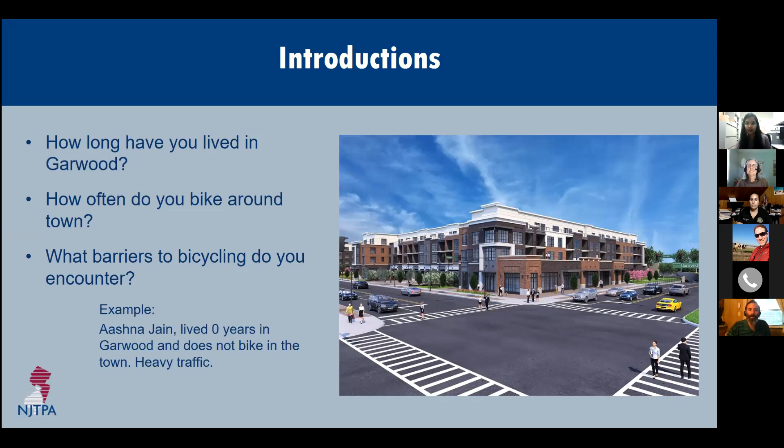Let's get started. First we'll discuss some of the basics of complete streets. Many of you might already be familiar with the term, but we'll still cover some of the basics again, as it's important for the discussion that everybody is on the same page.

Complete streets are designed and operated to enable safe access for all users: pedestrians, bicyclists, car drivers, freight and transit users of all ages and abilities must be able to safely move along and across a complete street. Complete streets make it easy to cross the street, walk to shops, and bicycle to work. A complete street offers many travel choices, as it accommodates all modes, connects to a wider network of transportation system, and is fully accessible to all, irrespective of how you get around.

It varies according to context, depending on the needs of your community, and as an end goal, it improves safety for all. Its benefits are many and varied.

It promotes healthy lifestyles by encouraging active modes of transportation like walking and biking, provides important connections to local destinations, creates more livable communities, reduces traffic congestion by giving alternatives to driving, and reduces reliance on fuel since it encourages greener modes of transportation. It also makes fiscal sense because incorporating sidewalks and bike lanes into the initial design of a project spares the expense of retrofitting later on, and it encourages economic investment in the community.

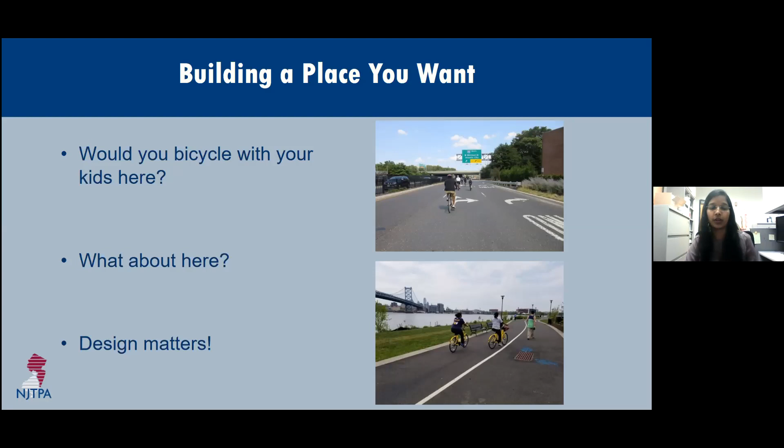When it comes to bicycling, people are commonly divided into one of these groups: the strong and the fearless, which is like 1% of the population, can bike anywhere and everywhere. They love to bike and nothing can stand in their way, not infrastructural conditions.

A larger group, 5 to 10%, are more enthused and confident people. They're a little more picky about where they will bike, and they prefer low stress roadways and paths.

The next is most of the population that is interested but concerned, and it makes up about 60% of the population. They have biked before, but don't do it often because they don't feel safe. And when they do bike, they do so in parks or as a part of events.

These people can become enthused and confident with improved facilities, encouragement, infrastructure, and overall experience. Lastly, of course, there are some folks who simply have no interest in bicycling, about 30%, or cannot due to a physical condition. However, these folks likely have friends or family members that are interested in bicycling.

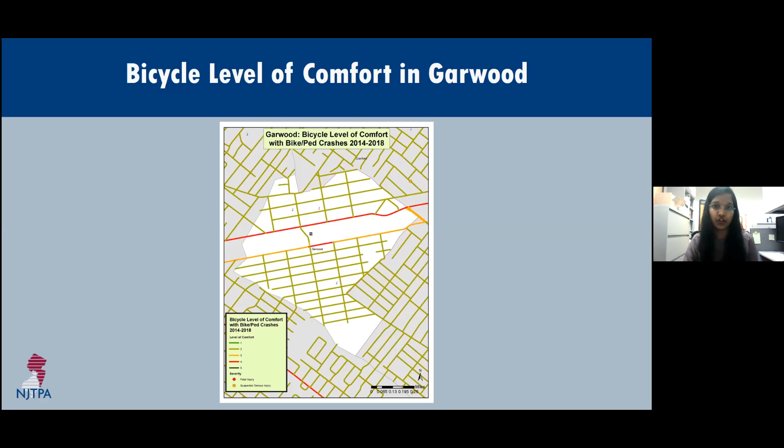We are here to help Garwood create a bicycle network plan, which leads to the question: what is a bicycle network plan? A bicycle network plan envisions how to complete the streets by providing accommodations for bicyclists. It identifies and builds a practical option for those who may want to bicycle but are not comfortable doing so on an incomplete street.

These facilities should provide connections to common destinations like workplaces, schools, transit, shops, and recreation. And we'll see and find these places in Garwood around the study area. Almost all of these destinations are also near the home, which is where most people spend the majority of their time.

According to the National Household Travel Survey, 50% of all trips in the US are short distance trips, like under 3 miles, and they could be done quickly and easily on a bicycle. The reason most of us don't do this is because roads are not designed for it. And by the way, this data is from before COVID.

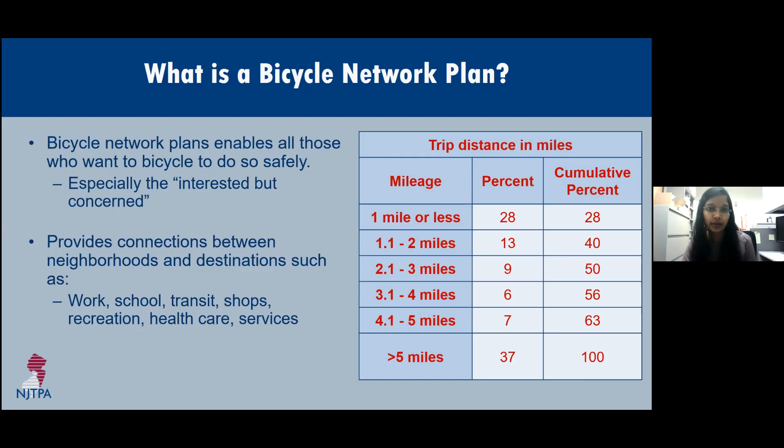A successful bicycle network plan is one that shows what kind of facilities work best for each road segment, taking into account everything that makes it unique. This includes factors like road width, speed limit, parking, and other unique circumstances. A good bicycle network plan is convenient, continuous, connected, and complete. But that's not all—it should also be comfortable, safe, intuitive, and visible for all ages and abilities.

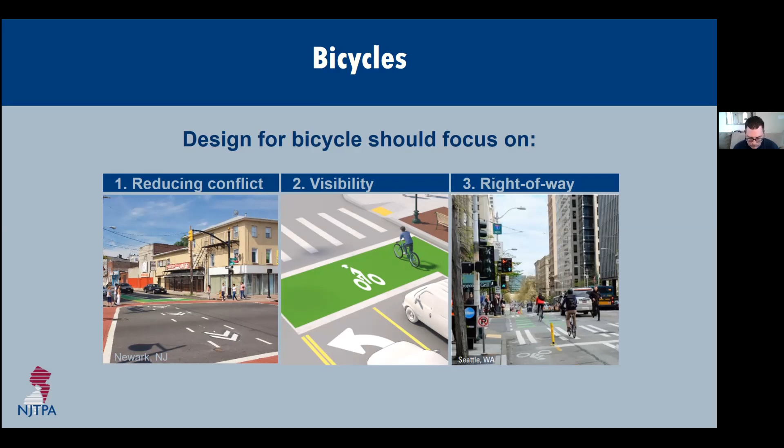Here we'll look into specific types of bicycle infrastructure facilities and options. When it comes to safety, designing for bicyclists means reducing conflict with other modes, improving their visibility, and establishing clear guidelines on right-of-way. We'll start by discussing the basic types of bicycle infrastructure that are visible, intuitive, and establish those guidelines for usage. There is a range of options available, from no separation from cars to complete separation, and more separation usually means safer and more comfortable. However, sometimes extra investment isn't needed if traffic volumes and speeds are very low.

We'll start with shared lane markings, or sharrows, which offer the least separation. Their purpose is to remind motorists that they're sharing the road with bicyclists, and that bicyclists have a lane. It also reminds bicyclists that they should ride away from the edge of the street. However, they offer no physical separation between the two modes. They're likely to help existing bicyclists, but they aren't very successful at encouraging new people to bike.

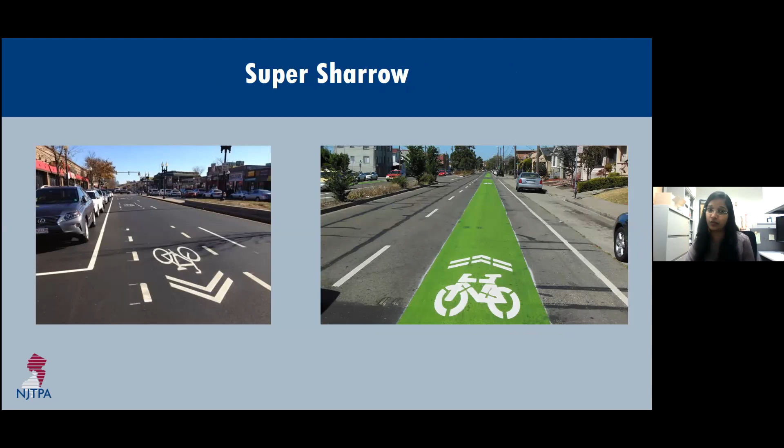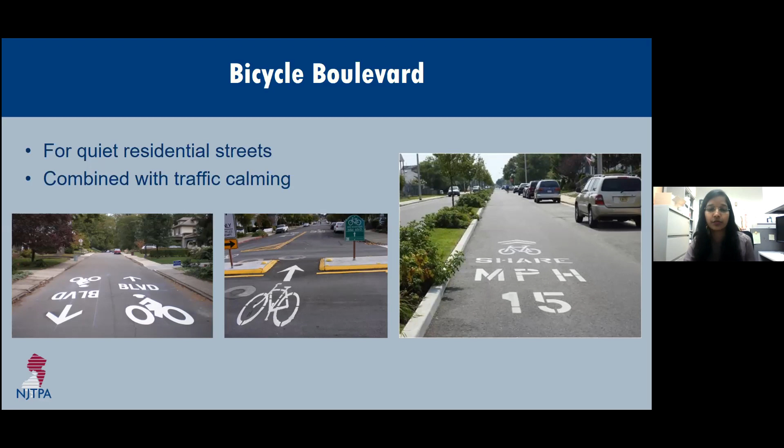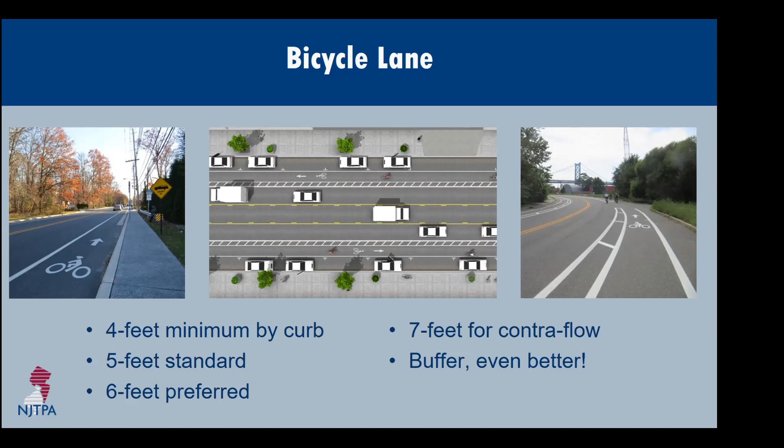How effective a bicycle lane is at getting more people to ride depends on the context of a roadway. On a high-speed commercial corridor, a bicycle lane is still only attractive to confident bicyclists. The image on the left here is from Cherry Hill, New Jersey, and this image is from Camden.

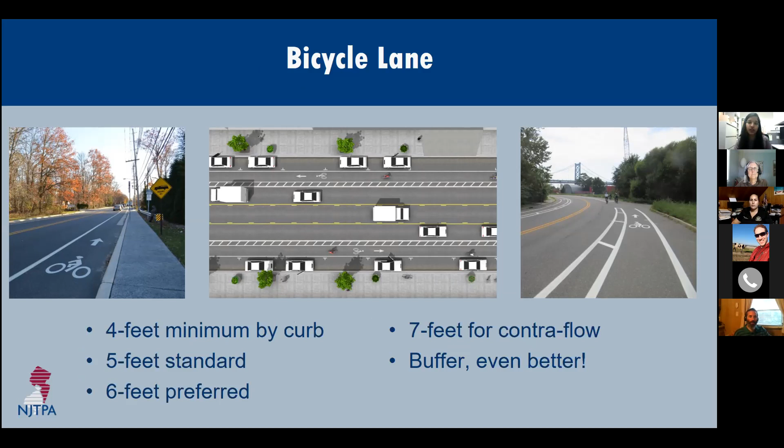This offers more safety because there is limited interaction with other traffic. For this treatment, you need at least 8 feet, and they work best if there aren't many driveways or turning conflicts. Special care needs to be taken at intersections, which can be the most stressful part of a bicycle trip.

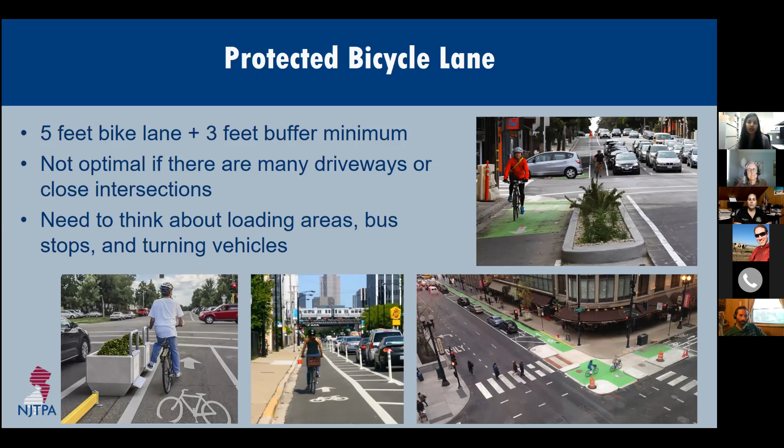A dedicated bicycle path allows two-way traffic and can be in the roadway or next to it. 10 feet width is best, but the minimum is 8 feet, and it's important to minimize turning conflicts. Bicycle paths can be shared with pedestrians, in which case it's called a multi-use trail. Almost everyone who rides a bicycle is comfortable on a path or trail, and it's easy to see how comfortable people feel when you spot children riding on bicycle paths.

I'd like to mention that a full bicycle network and plan includes some additional components that can be very localized. These include bicycle boxes that help bicyclists make a left turn, bicycle signals which remove turning conflicts, and of course bicycle parking at destinations. However, for today we want to focus on the wider network and the on-road infrastructure. While the final plan will include some site-specific recommendations, today we want to talk about the general infrastructure overall.

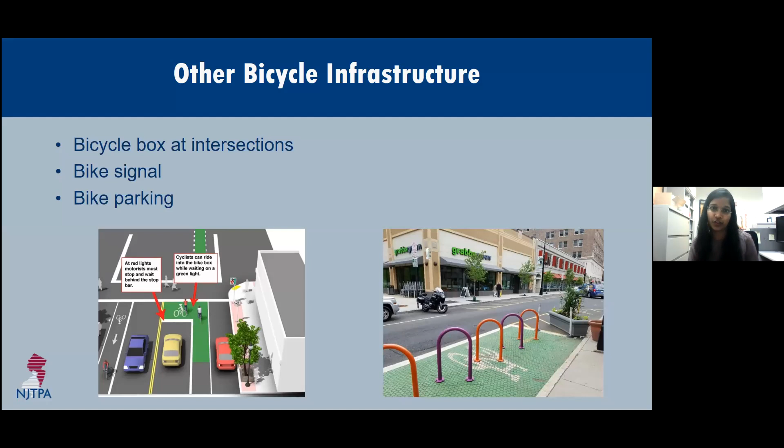So before we jump into the draft concepts, any questions about the previous slides? None have come in for the chat. Does anyone have a question? You want to raise your hand? We could call on you. All right, I don't see any hands raised.

Yeah, I see a hand actually, Bill. How can you not see a hand? Yeah, there we go. Oh, I was looking for the Zoom hand, not the real hand.

I apologize. One of my comments later on would be about the bus and the train, because they just canceled my train from Plainfield and I just biked all the way home, so I'm sitting here sweating. So I missed the first 9 minutes. You will have, I understand, complete streets - you'll have actual areas or recommendations outside of these concepts later, is that correct? Yes. Okay, thank you.

We'll go through the study corridor and specific recommendations for each street.

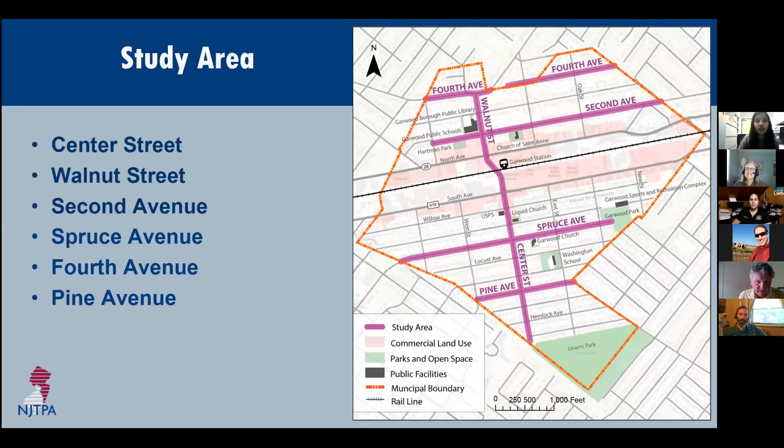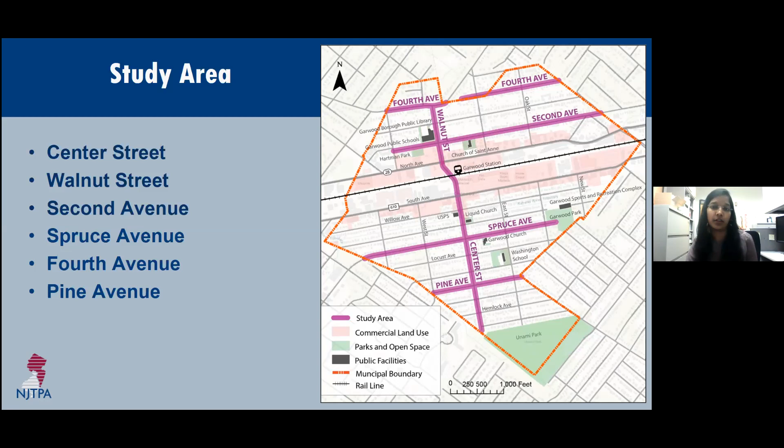Okay, so let's get started. Here you can see the study corridor. It includes 6 streets. We'll go through them in order of priority, as listed. We'll start with Center Street, moving on to Walnut, then discuss 2nd Avenue and Spruce Avenue in detail. We'll briefly look into 4th Avenue, discussing its unique recommendations not already covered in the presentation. Finally, we won't go into Pine Avenue separately, since its recommendations and treatments would be the same as other streets already covered.

Here is a map highlighting Center Street, which we'll cover in 3 parts, moving from south to north. The first part is from Unami Park to Willow Avenue, where the speed limit, as shown in the data, is 25 miles per hour. In fact, the speed limit for all roads in the study corridor is the same. We also received traffic data for these streets from the Garwood Police Department, which was really helpful in getting a true snapshot of how drivers behave on these streets. So thank you, Garwood Police Department.

According to this data, the 85th percentile speed for Center Street is 32 miles per hour in the northbound direction. This is the speed, for those who don't know, that 85% of traffic does not exceed. It's used to determine the posted speed limit on a road, which is expected to be within 5 miles per hour of this speed. Here, the 85th percentile speed being 32 is 2 miles per hour higher than expected, indicating that speeding is a concern on this side of the street.

Additionally, we see about 3,000 vehicles in either direction on average in a day, so it has a moderate average daily vehicle traffic. According to the New Jersey 2017 Complete Streets Design Guide, given this volume and 85th percentile speed, shared use lanes are not recommended on Center Street. Lastly, trucks over 4 tons - bigger than a small pickup truck - are excluded from this section, and hence 10 to 11 feet driving lanes are more than sufficient for this road.

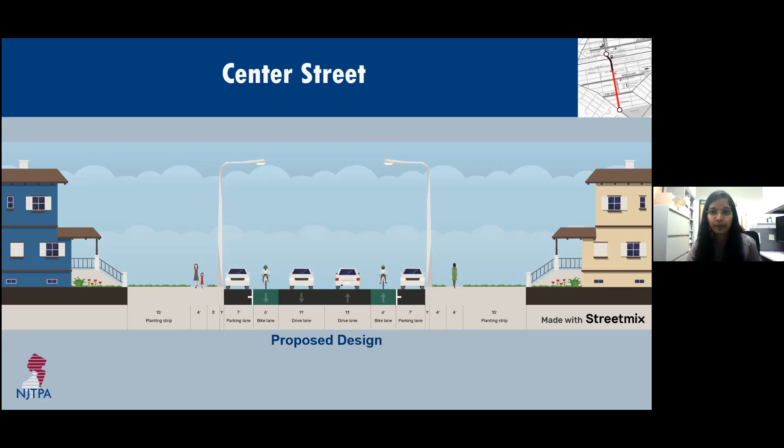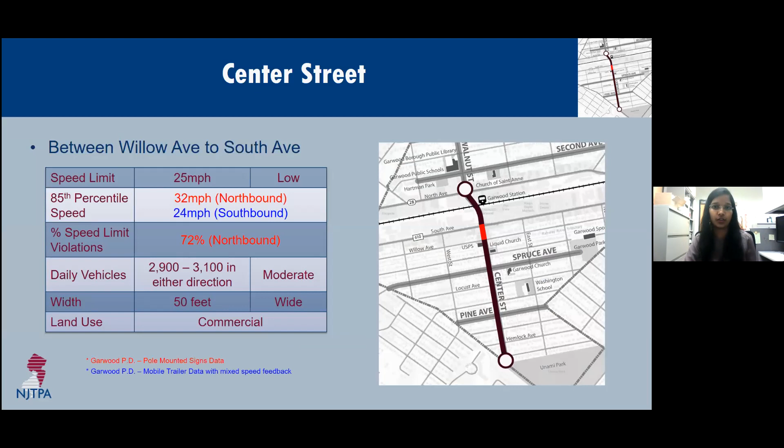The second part is from Willow Ave to South Ave, which is County Road 610. It is 50 feet wide with commercial and office uses on both sides. The traffic information for this part would be the same as described earlier, and trucks over 4 tons are also excluded from this section. This is how it looks like.

Here, the 2 lanes kind of divide with the road diet to make a 3rd lane, which is the dedicated left turn lane at the intersection with the county road. So this is the street section near the intersection. We have the left turn lane and the other 2 lanes with parking.

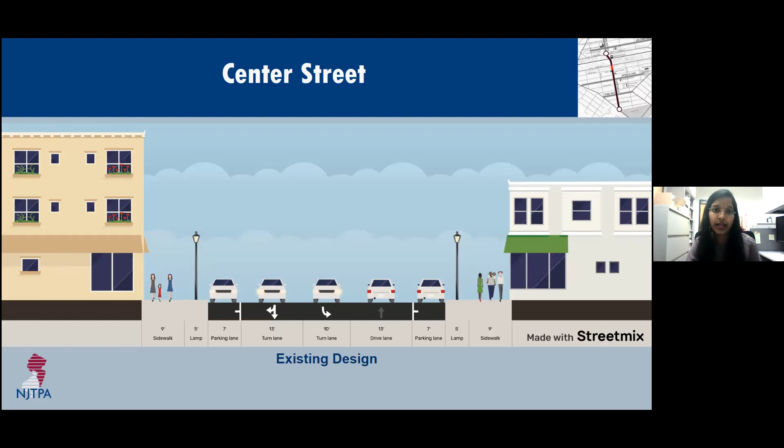With 3 lanes here, this section does not have space for bicycle lanes and parking on both sides. In order to continue the bicycle path, around 5 parking spaces must be removed from the southbound side of the street. Note that a bicycle lane is recommended for this section based on its average daily traffic volume and speed.

So if we take out those 5 parking spots, we'll have bike lanes on both sides with a barrier on the southbound side. And this is a second alternative in which we do not take out parking, and we have a bicycle lane on the northbound side only and a sharrow on the other side.

Those parking spaces are pretty valuable for our downtown businesses. Is there an overlay that I could see of how you would do the bike lane with the sharrow lane? This is the alternative for that. The bicyclist would share the driving lane with the cars on the southbound side, and the parking lane would still be there.

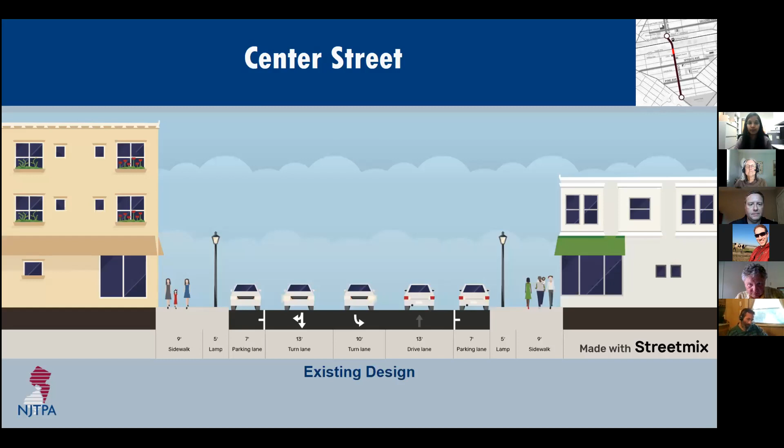I have a question. So what was the thought process for the second option of doing the sharrow going south as opposed to going north? Does that make sense? Does that question make sense?

So basically on your second version, why on one side, not the other? What was the rationale? We prioritize the bike lane on the northbound side because, as the data indicates, it has a higher 85th percentile speed.

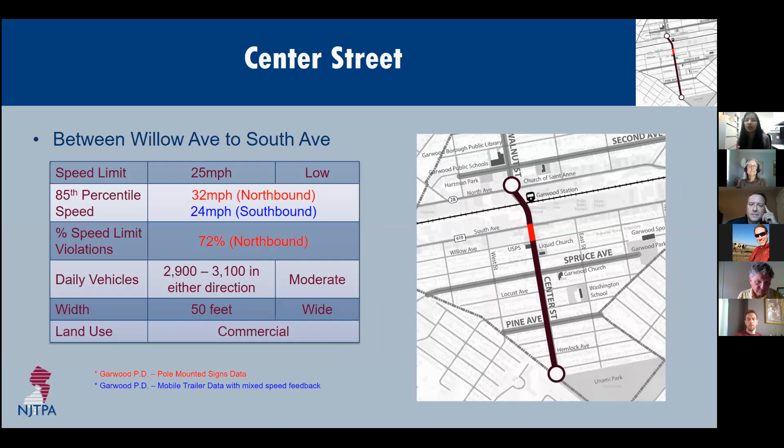And if we look at the average daily traffic for the northbound and southbound side differently, the northbound side had more traffic as well. So it had more traffic and higher speeds, which is why we placed the bike lane on the northbound side. Got it. Thank you.

Comparing the alternatives, I think for these 5 parking spaces, if the municipality could maybe adjust them near those businesses, then this could be a good option for bicyclists. But yes, we can include both of these recommendations in the final report.

Ashna, we have Bill raising his hand, his actual hand again. Yeah, I don't have it. I don't have a what do you call it, raise hand button on the bottom.

Okay, yes Chief, and if it's a choice between 1 or 2, I would definitely go with number 2. We need to keep those parking spaces for the businesses, and a sharrow for 1 block certainly makes more sense than not having a way northbound at all. We certainly don't want to come up center, end at Willow, and have people on the sidewalk.

So if you're asking for choice, alternative 2. Yeah, okay, thank you. Lisa Lee in the chat just wants clarification on which businesses are those parking spots in front of. That's a good question, I am not sure.

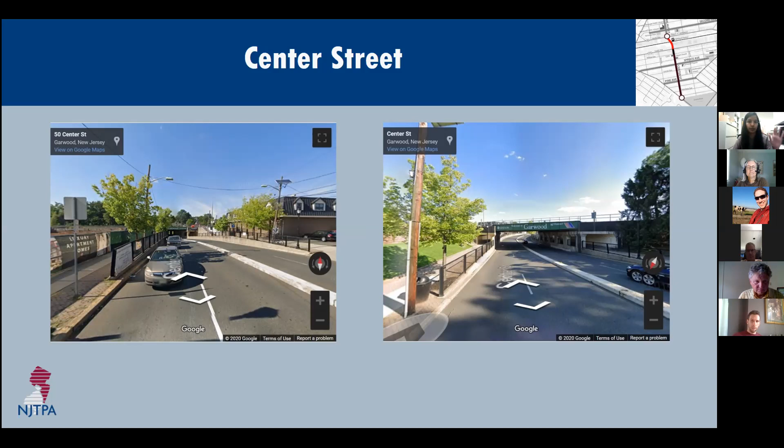This is how it looks like. It has a raised median in the center, 4 driving lanes, and a separated sidewalk. We can see the railway bridge going above it. This is a closer image of how the railway bridge and the road look.

In the section, we can see the separated sidewalk has a clear width of 10 to 12 feet, excluding columns, light poles, or other obstructions. The proposal is to convert these wide sidewalks to shared use paths that bicyclists and pedestrians can share, offering a physically separated and safer path for bicyclists. To avoid increased conflict at the terminal intersection, we propose the bicycle movement in these paths be one way on either side, in the direction of traffic.

Next, we have recommendations for the Center Street at South Ave intersection, which is challenging because of heavy traffic on both streets. Note that South Ave has a speed limit of 35 miles per hour and is 40 feet wide. This is how it looks - it has pedestrian striped crossings and pedestrian signals.

This map shows the crash data for Garwood bicycle and pedestrian crashes from 2015 to 2019, and we can see that bicycle and pedestrian crashes cluster at and near this intersection, as well as the next intersection with the state road. This image shows the new development getting constructed on one corner of this intersection.

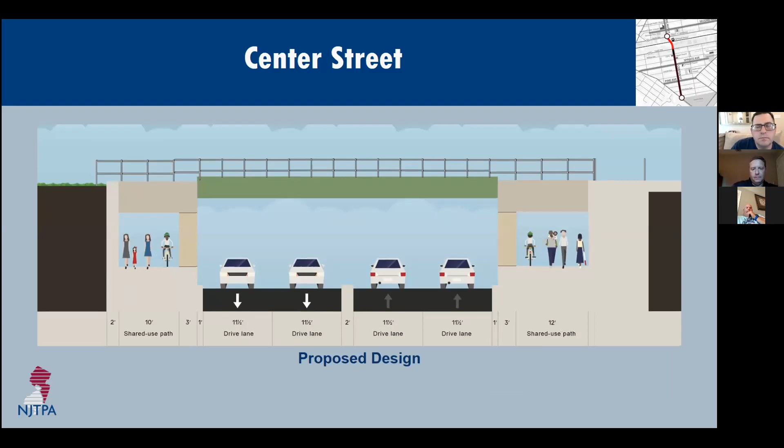No, that's correct. Can you hear me? Yes, we can hear. Okay, I'm jumping back.

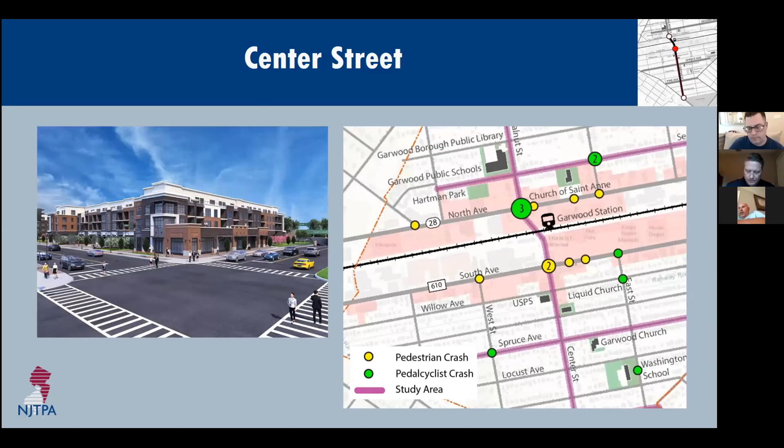I raised my hand towards the end of the other part with the parking spaces. The sidewalk there, depending on where, closer to the police department, is like 14 feet wide, and down by Golden Scissors it's like 10, 12 feet wide. I don't know if there would be opposition to putting the bike lane actually on the sidewalk in that area. I was just down in Delaware, and that's the way everything is - all the sidewalks are like 10 feet wide, half people, half bicycle, at least for that block, so we could save parking spaces.

Yeah, I think that's a great idea, and we can look into it if it has the clear minimum width that we need for a shared use path.

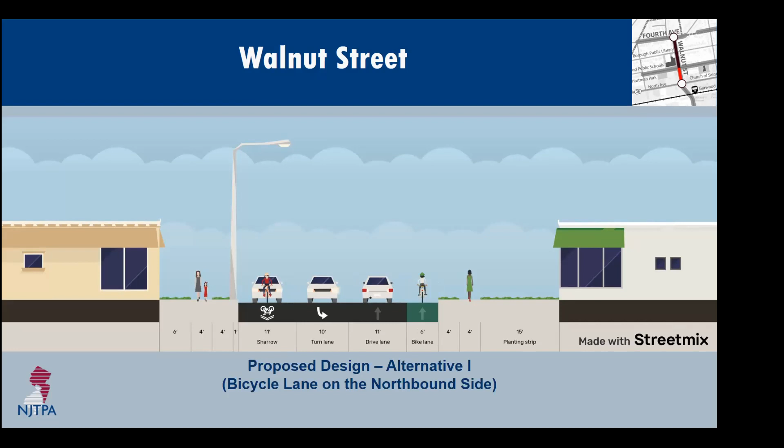In the second alternative, we do not remove parking, and there are sharrows on both the sides.

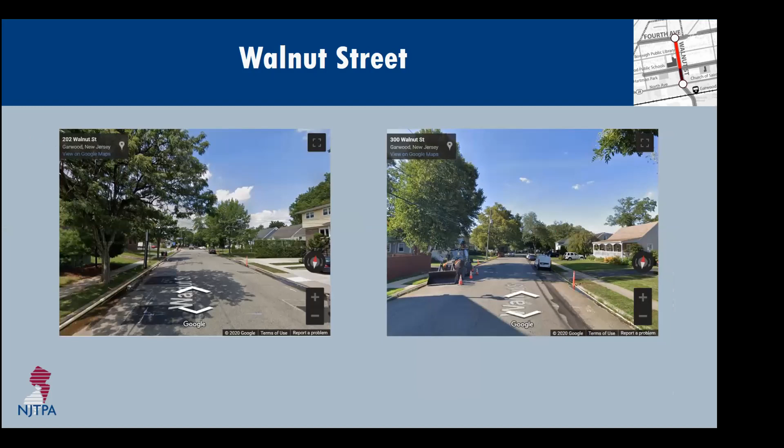The next section is from 2nd Avenue to 4th Avenue. This is also 38 feet wide, and it has residential uses and the school. This is how it looks like, 2 lanes and parking on both sides. The existing design, as we already discussed, this is how it looks like.

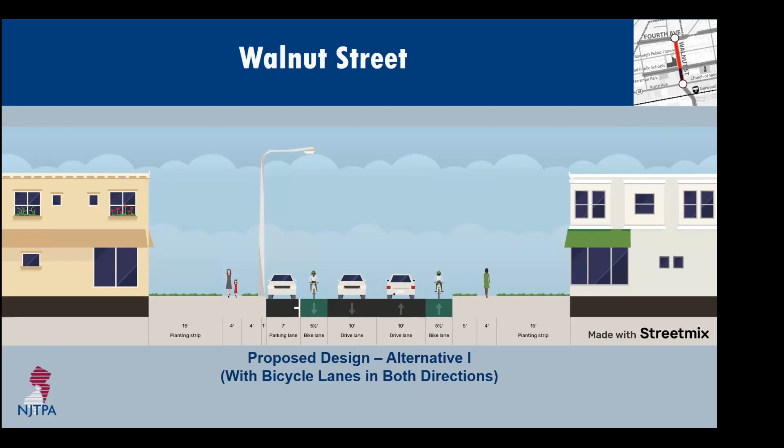And in the proposed design, alternative 1, if we take out parking on one side of these 2 blocks, we can give bicycle lanes on either side. This will enhance bicycling to the school and complete the connection going to Center Street. In the second alternative, we have sharrows on both sides and parking on both sides.

So yes, before we go on to the next street, does anyone have any questions, comments, preference of alternative, lives in the area, feedback?

So Ashna, there's just a little more conversation about the previous train station section. Lisa Lee mentioned a survey to see if people would rather bike on the sidewalk or on the roadway. Jonathan asked if the NJ Transit corridor has been considered.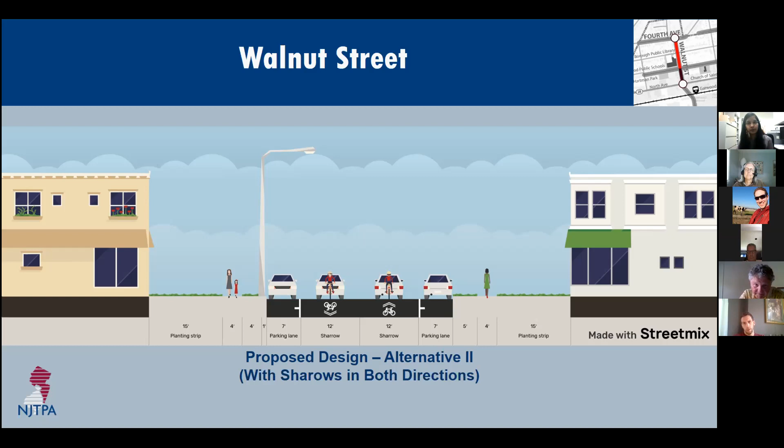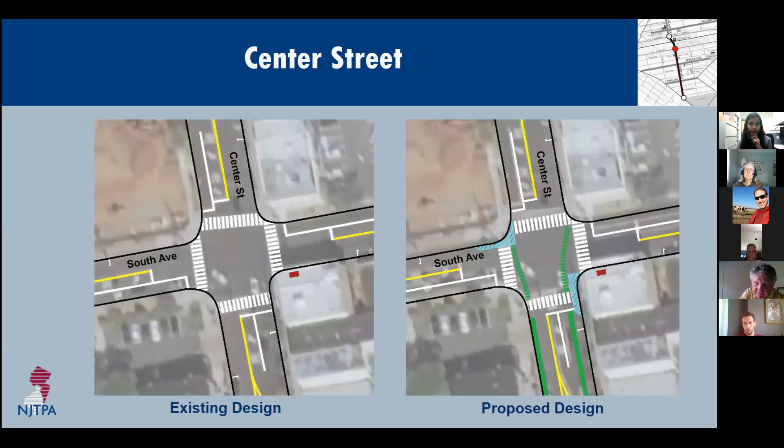NJ Transit corridor has been considered. I'm not sure what that means. Do you mean like going on the road, like going here? Jonathan, do you want to get on and clarify what you mean? Oh, for east-west travel, are you talking about South Avenue, or do you want to unmute yourself and just clarify? Oh, he means the right-of-way the train takes. So Jonathan is asking if anything has been considered using the excessive right-of-way along the train route.

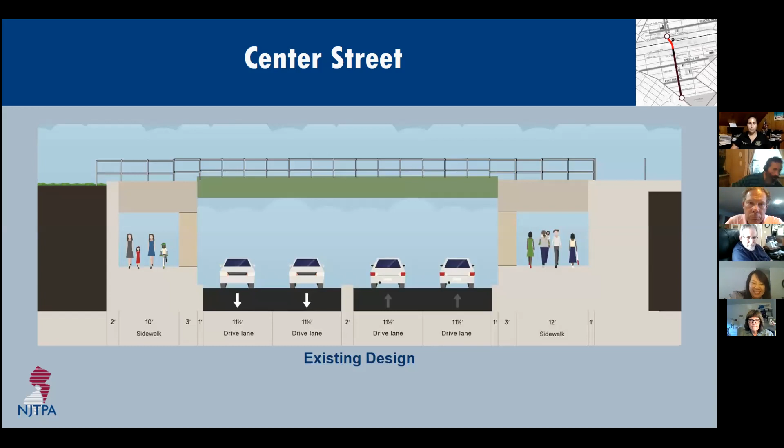There was a study. Can you hear me? Yes, all right. There was a study done over 10 years ago. I'm trying to think of the initials for a bus rapid transit system using the Raritan Valley Line corridor. If you're not familiar with it, I would encourage you to look it up. New Jersey Transit funded it. Rapid transit system that would go all the way from Newark Airport down through Jersey Gardens, through IKEA, over to the old Central Railroad line, through Cranford to Garwood, using that old rail corridor, which is, we know, the Raritan Valley line, and it'd be interesting to look at. Okay, that's great to know. Thank you.

So would NJ Transit's website be a good place to find this study? My guess would be no, only because when they did it, they actually had money. Now we know they don't have anything. I have a study at work, I mean, I can send it to you. Yeah, that would be great. Yes, all right, okay, thank you.

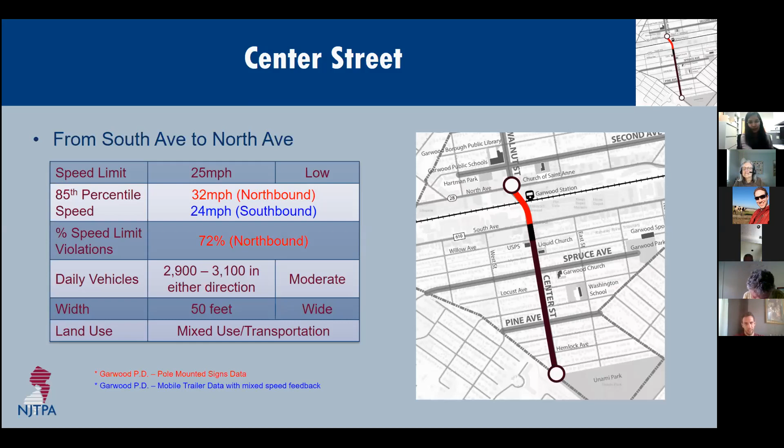And then Lisa Lee mentioned she prefers having bike lanes for the kids riding to school, safer for the children, and she thinks parents will agree. Yeah.

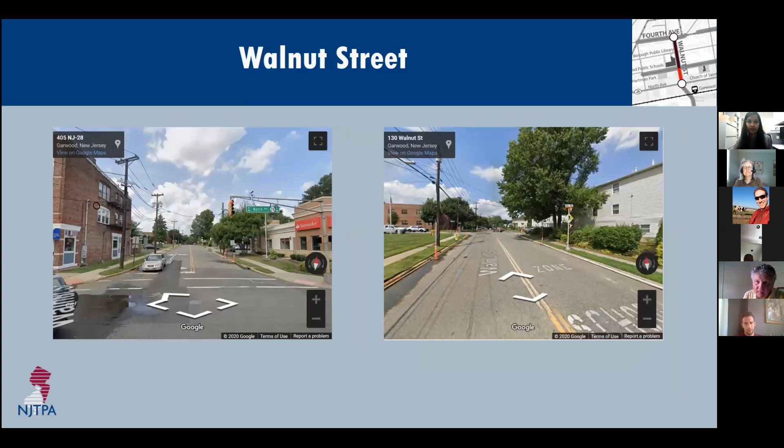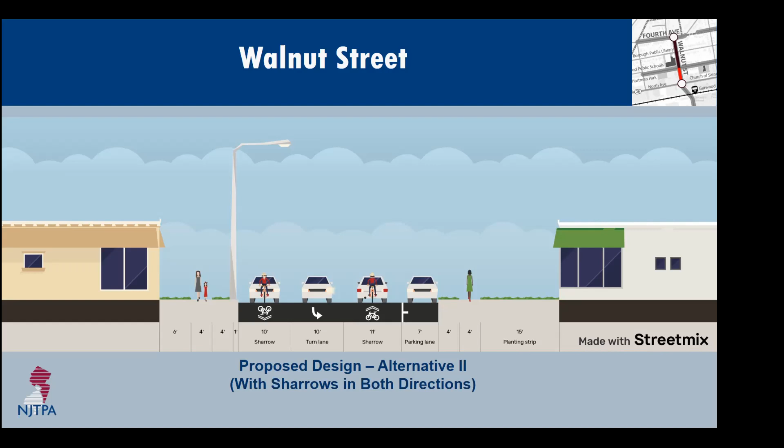Vince Carney is on here, right? I believe Vince is one of the participants. Yes, Vincent Carney is. His wife is the crossing guard at the corner of Walnut and 2nd. That's a dangerous intersection. You may not look at it, but you might want to talk to the crossing guards in terms of recommendations there, because drivers don't listen to the crossing guards at that corner at all. Vince probably doesn't want to mention it, but his wife has been hit a number of times. Oh. So separation is very important.

Yeah, thank you, that's great feedback and so important to know. We would appreciate any more feedback on that intersection. Please put it in the chat, or you can also send it to us later. Hey, I see Stephen Greet has a hand raised. Stephen, do you have a comment about the section?

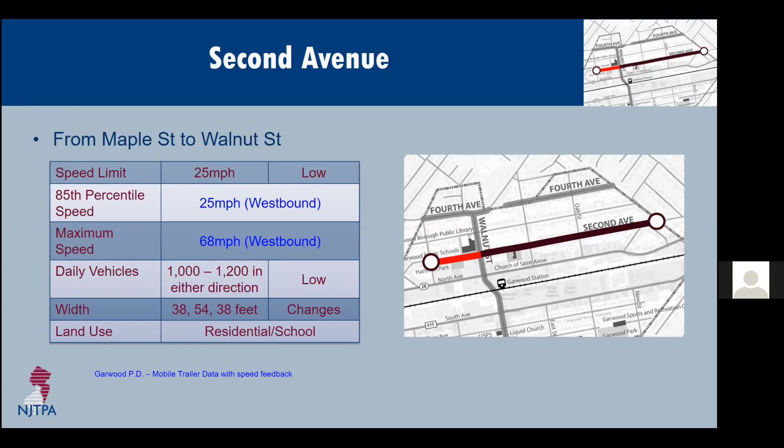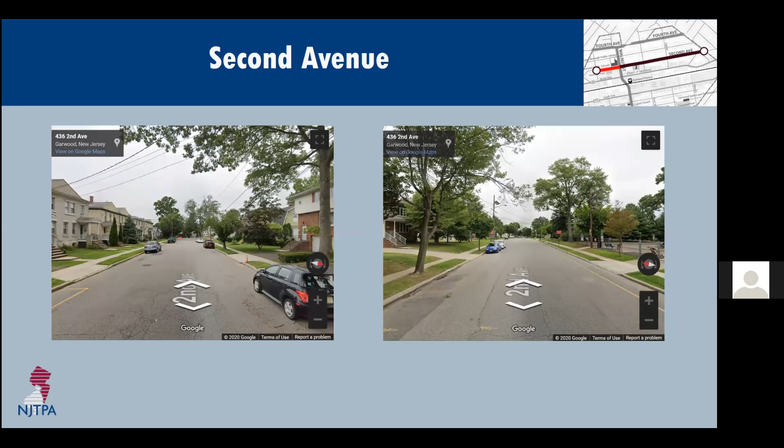This is how the street looks in the residential part, with parking on both sides and the road in one-way direction. In front of the park, it has parking only on one side. Then in front of the school, it widens to 54 feet, as we can see in this image, and there is a mid-block crossing.

Now we'll look at the existing street section: a 24 foot drive lane with parking on both sides. In front of the park, there is no parking, so the drive lane is 31 feet with parking on one side. In front of the school, there is a drop-off zone, parking on the other side, and a 40 feet driving space in the middle.

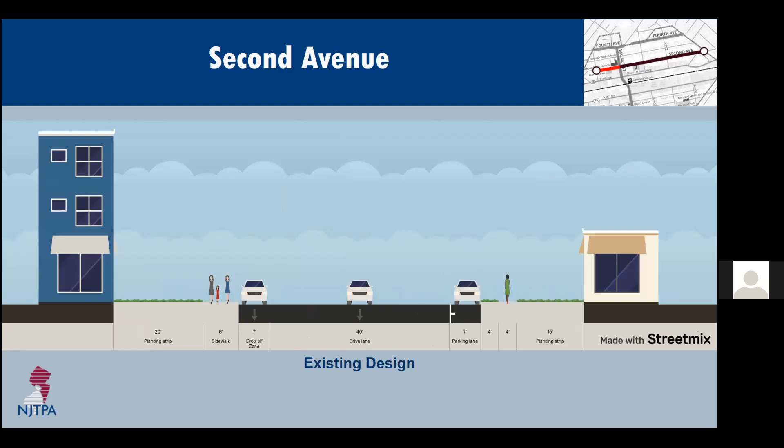In the proposed design for this road, we propose a bicycle lane and a contra-flow bicycle lane on the street, as it provides access to two high-use destinations. With one-way traffic, the road has space to accommodate both lanes. The contra-flow bike lane is separated from traffic through a 2 feet buffer throughout the length of the block.

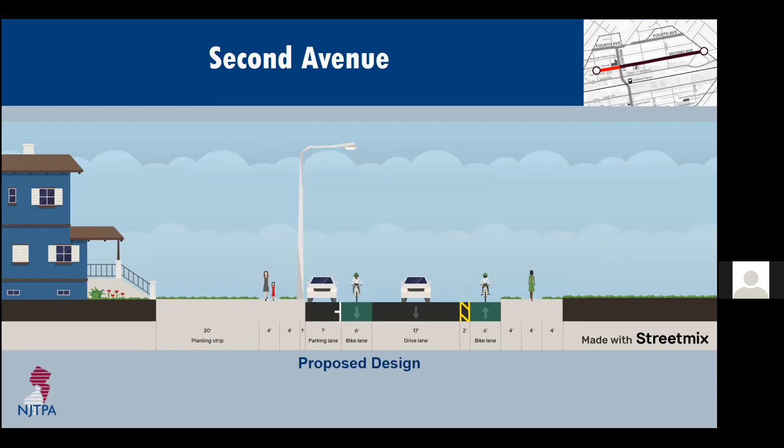In front of the park, the section is the same, only because there is no parking on this side, the bike lane would abut the curb and the sidewalk. In front of the school, when there is parking on this side, the bicycle lane would abut the parking. On the school side, the bicycle lane and the drop-off zone would be separated by physical barriers, so people dropping off kids do not intrude into the bicycle zone.

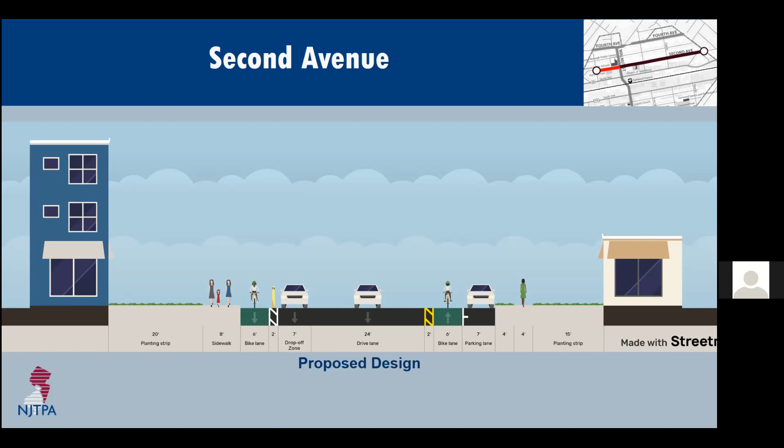To make it simpler, here is how the bicycle lanes would go along the block. On the park side, it stays beside parking wherever there is parking. On the other side, it stays next to parking, then goes in front of the school sidewalk, and the drop-off zone is separated from the bicycle lane with physical barriers.

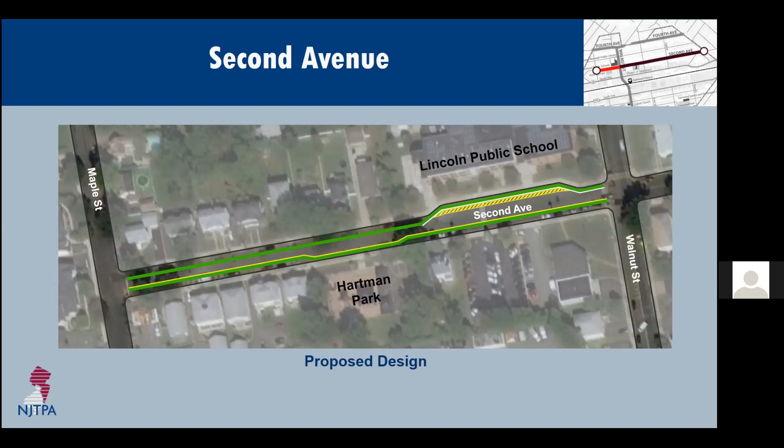The next part on Second Avenue is from Walnut Street to Gallows Hill Road. Unlike the first part, this is two-way, 38 to 40 feet wide, mostly residential uses on the side, but it also has St. Anne's Convent and Church. We already discussed the traffic on the westbound side. Eastbound, the 85th percentile speed is 29, which is within 5 miles per hour of the posted speed limit. However, the data shows drivers go up to 70 miles per hour.

The potential options to create bicycle accommodations here is an advisory shoulder or an advisory bicycle lane treatment. This is an experimental treatment that does not yet exist in New Jersey. However, there are about 20 examples across the country, and it is a common treatment in Europe.

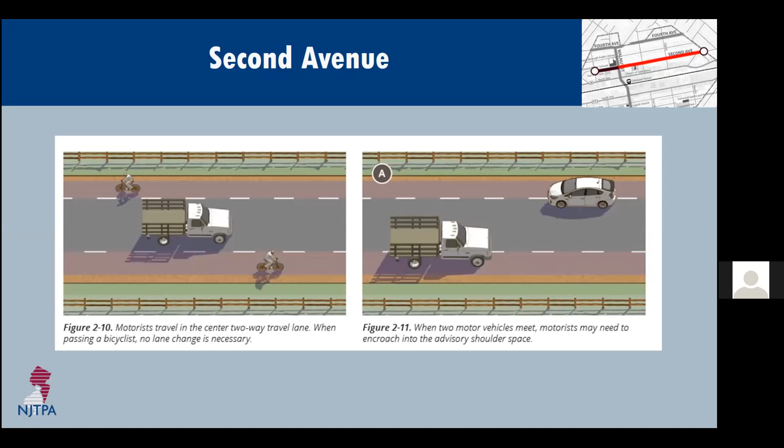As you see in these images, the road works like a two-lane road if there is no bicyclist on it. But if there are bicyclists, then it works like a one-lane road where traffic moves into the center to make space for the bicyclist. Currently, the roadway does not have any striping on Second Avenue that divides directions of traffic, which means a driver wishing to pass a bicyclist moves into the opposing lane of travel to pass.

An advisory shoulder is similar, except that the marking in the roadway makes it clear how much space the vehicle needs to give the bicyclist. In terms of driving behavior, it is similar to how people would typically drive here - they drive in the middle and then move to the side when they see oncoming traffic.

Here is an example from Edina in Minnesota on how an advisory shoulder could look like on a residential street with parking on both sides.

This is how the proposed design advisory bicycle lanes could look like on this section of 2nd Avenue. In addition to the change in striping and paint for more visible demarcation, traffic calming strategies could be investigated to help enforce a lower speed limit.

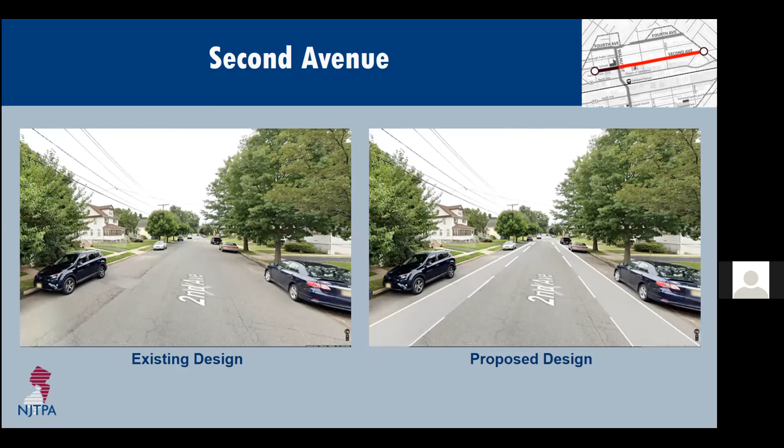So Ashna, I just want to relay from the chat - there was some discussion about speeding, and the only other question was if additional bike racks are going to be mentioned in the plan. Yes, that's a good question. I think we'll definitely try to cover bike parking and bike racks and explore opportunities for that in the plan.

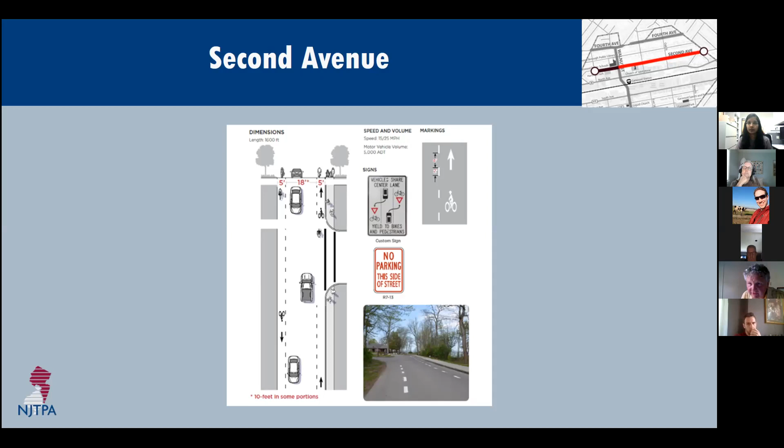There you go, very low traveled street. And if you get to 3rd, there's actually borough-owned property that goes from 3rd to 4th. In 1998 I actually recommended that that be converted into a passive park for the neighborhood. Well, that has never actually been implemented. Providing a bike lane through that could start actually making that a park there, a passive park.

And so you could go from 2nd to 3rd to 4th, and then turn on 4th and work your way west. And I know I'm jumping ahead, but you started at Maple. My recommendation to you would be to go into Westfield, because if you take 3rd into Westfield, you go into Gumpert's Park, which is where Westfield has their bike route. And you could connect with Westfield's bike route, go around Gumpert's Park, create another loop, and then come back out onto 2nd, and you'd have a complete loop on the north side of town from the Cranford border to the Westfield border.

Can you mention the name of that park once again for me? Sure, who can spell it? Is it G-U-M-P-E-R-T? I know Jonathan O'Hay will know. I think it's Gumpert, G-U-M-P-E-R-T. Yep, Jonathan has it, Gumbert, G-U-M-B.

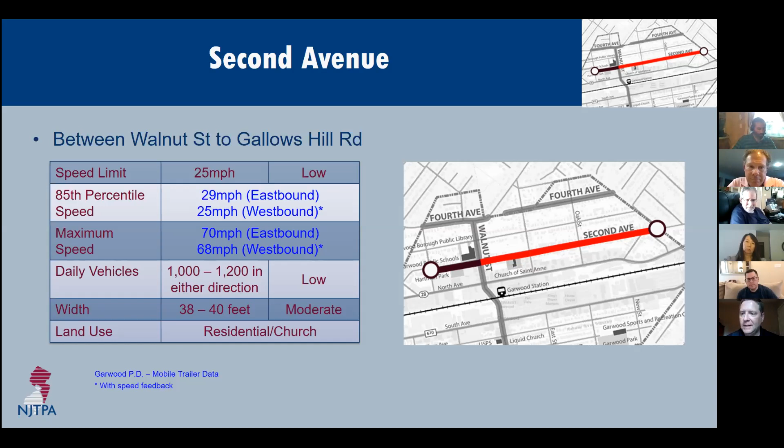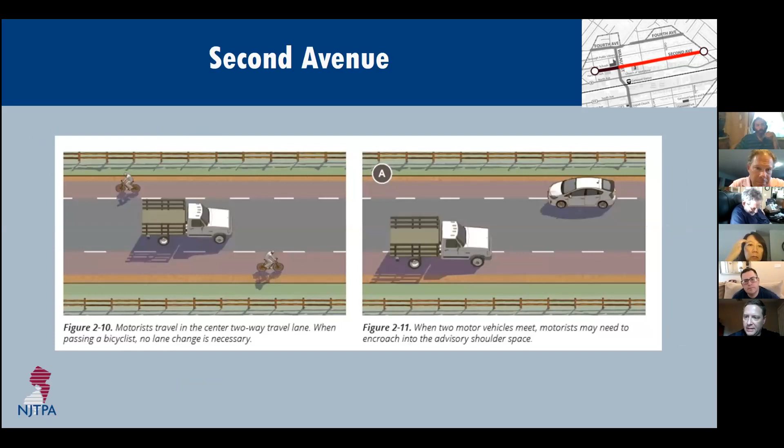Going back again to 2nd Avenue, the idea of a shared lane with the two bike lanes on the side, do you see that as a traffic calming device as well? It seems like it would be, this advisory bike lane treatment. Yeah, I think it does look like a traffic calming treatment as well.

But actually the next section kind of talks about this. And I think, even though the design here is like that, you may want to put additional features that make sure that people stick to it and follow it as well.

Yeah, right. We also have... I'm all ears. Oh, sorry. We also have Stephen Greed, who has a hand raised.

I think that's a great concept that Bill came up with, and I agree. I think that really should be looked at and maybe pursued, because that would lend really access to a wide variety of areas for bicyclists and pedestrians too. Thank you, it does look like there are many opportunities there, and we will definitely explore them.

Right, then Mark mentioned he really likes that proposal that's on the screen right now. And Aaron has a question: is it expected that bikes would observe the one-way section of 2nd Avenue, which I believe he's referring to the section between Walnut and Maple?

Bikes would observe this section. Yeah, Aaron, do you want to unmute yourself and clarify your question? Would bicycles actually be limited to going the right way on the one-way street?

I think I would like to keep this alternative since there is this park on the other side. Plus, yeah. But what do you think? Would you like to see bicycle lane only on one side here or both sides?

I like the bicycle lanes on both sides. The question is, bicycles, especially with children in the area, would be going one way, both ways on that street, not just one way. But if you follow the strict interpretation of the traffic laws, I believe that bicycles are supposed to only go in the direction of traffic on a street.

No, I think there is this concept of contra-flow lanes that's recommended if there is a high use destination, which I believe, because of the park and the school, is there. So that would be recommended, a contra-flow bicycle lane would be recommended for this block. So bicycles would be expected to go either east or west along that section of 2nd Avenue.

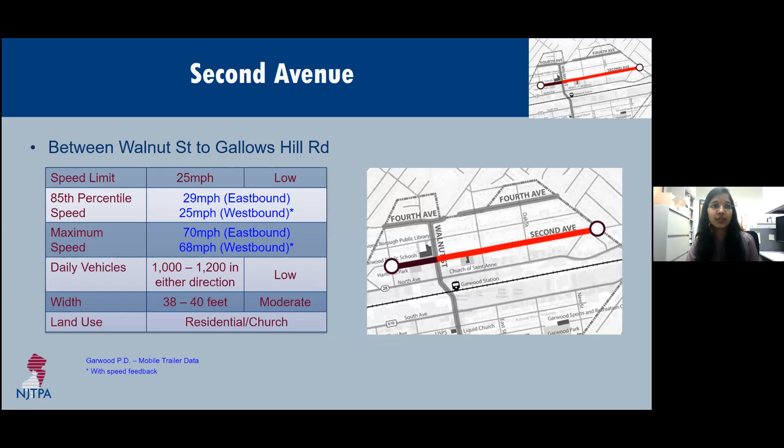Yes, they can be allowed to go in both directions. Okay, Lisa Lee just has a quick question for Bill, which I'm answering. Okay, perfect. Let's move forward because we have one more raised hand, John Bartolik, who hasn't spoken before.

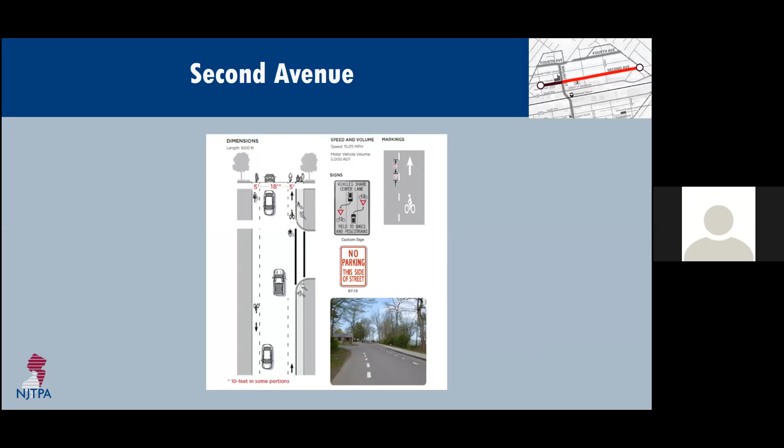Yes, I'm just tagging on to this point about having a one-way street and having bicycle traffic coming into the one lane of car traffic. That's the drop-off zone, that's like the death zone of this area. Nobody's paying attention. You've got pedestrians, you've got people cutting in and out.

Do you know that area well enough in terms of how it's really used at school drop-off and pickup times to make that kind of a recommendation? You could be serving up cyclists for incoming traffic.

Okay, so are you concerned about this intersection? I'm concerned about the fact that when you are going against the traffic flow direction, unless I'm completely misunderstanding your diagram, that's where all of the parents are dropping off children at the school in the morning.

Yes, and it's chaos. And if you're going to feed into that incoming bicycle traffic in a lane on that school side of the street, I'm just asking if you really understand the usage patterns at those critical times to make that kind of recommendation.

Because if you're not sure, I think you need to take a step back and revisit that area, because that is, just in terms of pedestrian and vehicular traffic in those critical hours of the day, in the morning and the afternoon, absolute chaos.

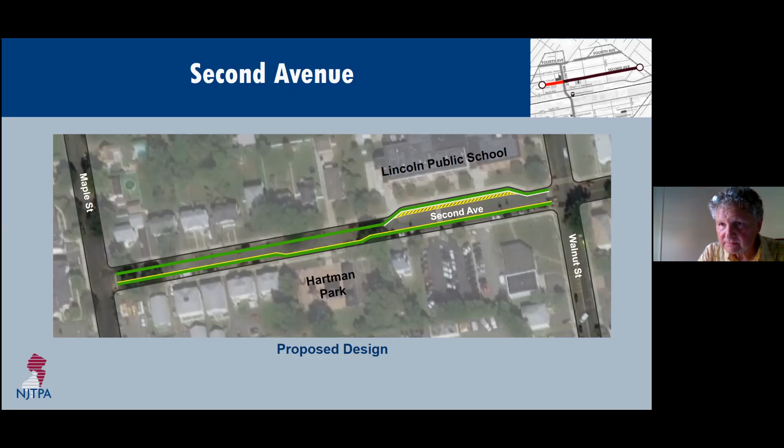Yeah, that's helpful, we'll definitely look into it. I think we did explore some drop-off pickup zone designs, especially for school buildings, to put into this recommendation, but we will definitely research a little bit more and consider all of your feedback to see what could be more functional and better.

Safe Routes to School would never encourage you to have bicyclists coming into a street where you've got possible drop-off times on both sides of the street. That would be really dangerous for those children riding to school. It would be better to have them enter the school property on another street. Especially if they're going against traffic, those parents could be focused on dropping off their kids and not being late, and kids riding fast towards them introduces too much conflict.

Yeah, we have a safe travel guide, maybe I can share with you. Yes, that would be really helpful. Thank you, that's a great concern.

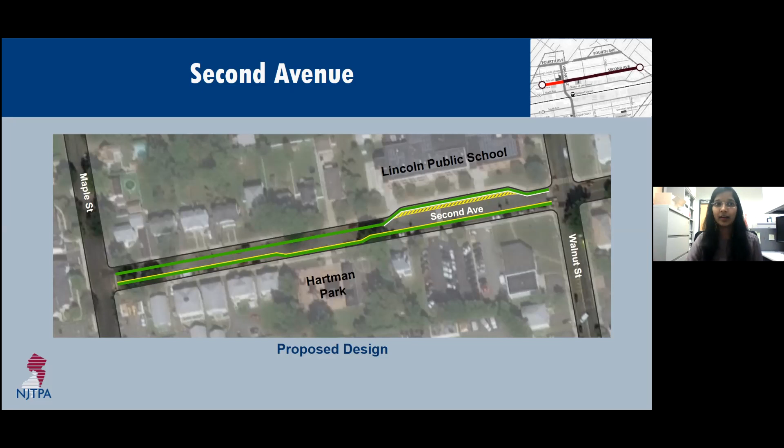Okay, let's move forward because we still have a few concepts to cover.

So we looked into the designs for 2nd Ave and the advisory shoulder treatment. Adding on to these changes, we also propose looking at bicycle boulevard treatments on 2nd Ave along all of its length, which will prioritize bicycles and pedestrians. As mentioned earlier, this is done by lowering speed limits and installing traffic calming measures that discourage cut-through traffic. Note that these treatments are general and can also be applied to similar streets, including Spruce Avenue, 4th Avenue, and Pine Avenue.

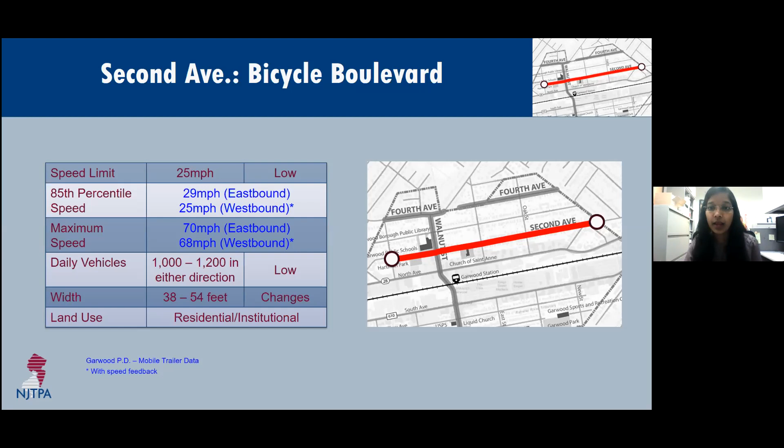A bicycle boulevard treatment can be a very cost-effective way to improve bicycle conditions. The specific tools we propose would be a 20 miles per hour speed limit sign, enhanced signage and pavement markings, chicanes and neck downs, mini roundabouts, which we'll look at shortly, and speed humps and raised crosswalks if speeding remains a concern.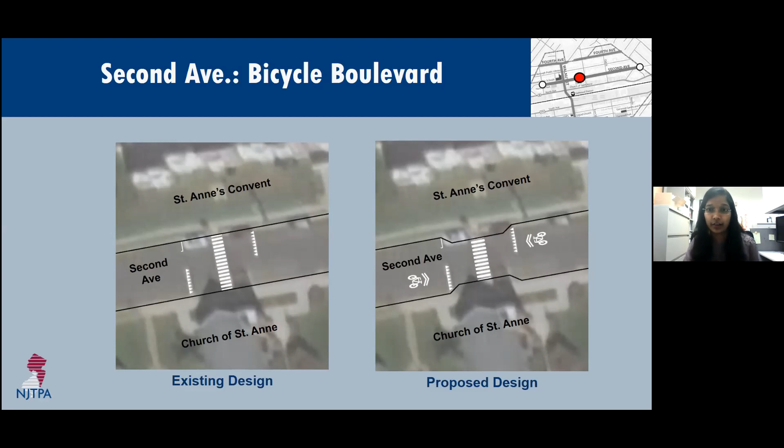In future, if speeding still remains a concern after incorporating all of those suggestions, the crosswalks here could be converted to a raised crosswalk with a broader, flatter speed hump that is bicycle friendly, as seen in this image from Bellevue, Washington, where they're labeled as speed bumps. These humps allow for little to no discomfort at speeds lower than 25 miles per hour and will only affect vehicles going at higher speeds. Additionally, they are designed with emergency vehicles in mind.

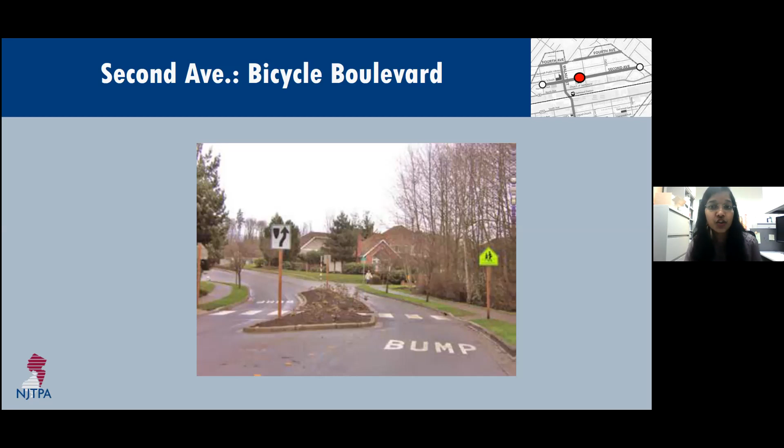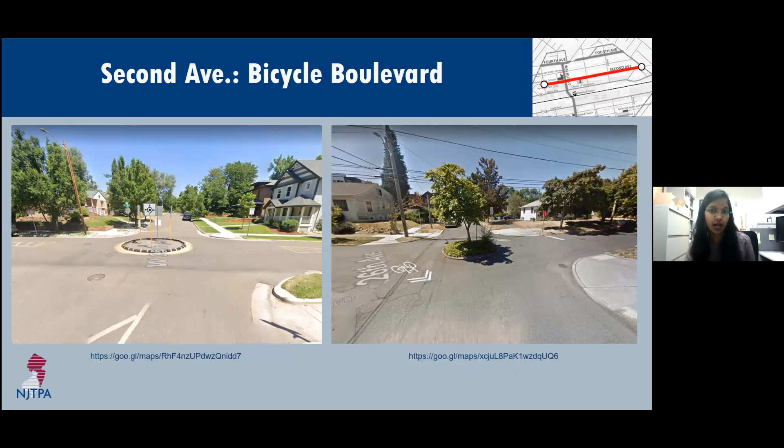These are examples of what the mini traffic circles or roundabouts could look like. It is possible to install them at a very low cost to test their effectiveness, as seen here in Denver on the left. Eventually, they can be converted to a permanent circle that adds greenery, as seen in Seattle. We will look at implementation examples for a mini roundabout later in the presentation.

Another alternative we can recommend here, which we discussed a lot already, is to turn the road between Cedar and Oak to one way in the opposite direction. This alternative will use traffic diverters, which are a great way to restrict a roadway to local traffic and bicycles only. We can further recommend analysis of this alternative in the report.

So before we jump on to the next street, any questions or comments? We'll try to do it quickly since we still have a few more streets to go over. Nothing in the chat related to this section, and I'm not seeing any raised hands. Thank you. If you have any other feedback, you can post it in the chat and we can take a look at it later on.

Next, we move on to Spruce Avenue, and we'll cover it in two parts. The first part is from Columbus Avenue to Center Street, and it is 36 feet wide with residential uses on either side. Eastbound, the road sees about 1,200 vehicles on average in a day, and the 85th percentile speed here is 32 miles per hour, which indicates that speeding is a concern on this section.

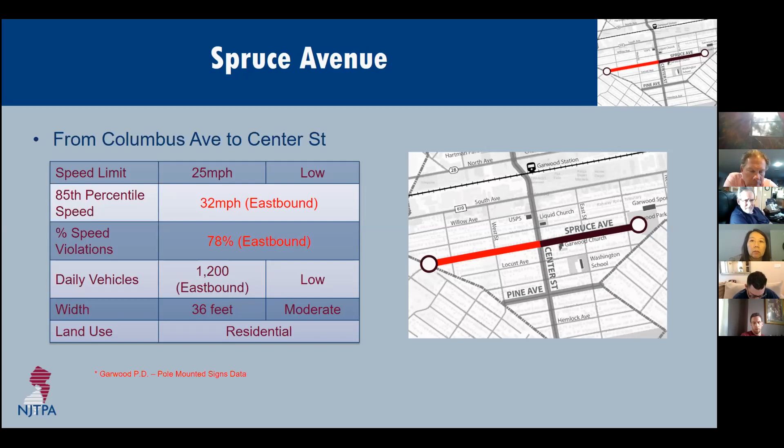We do not have detailed traffic information for the westbound side here. As seen in these images, it has 2 lanes, residential uses, and parking on either side.

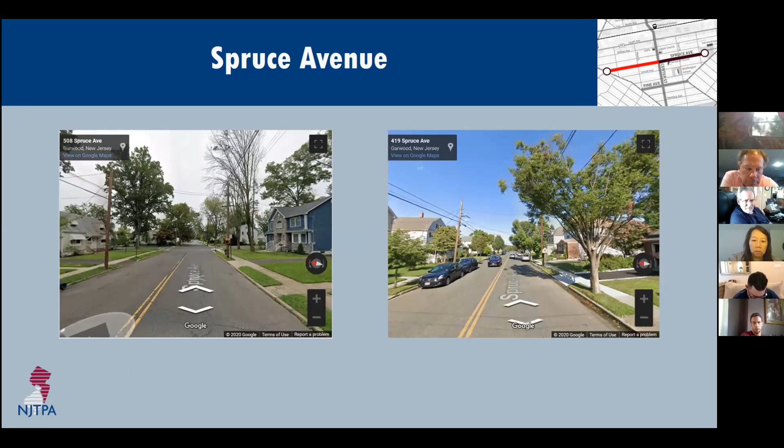This is how the existing section looks like. This does not have the width to accommodate dedicated bicycle lanes, so we propose sharrows on either side. I think the advisory bicycle treatment that we discussed earlier is also an alternative for this road if the municipality decides to work with it, like after maybe testing it on 2nd Avenue.

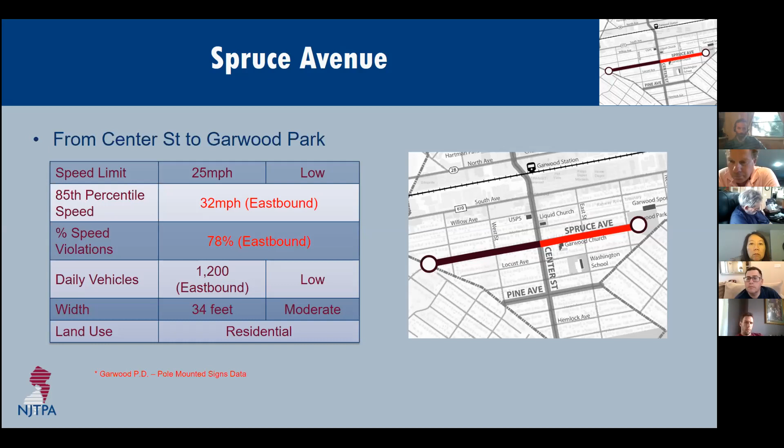The second part of Spruce Avenue is from Center Street to Garwood Park. It is 2 feet narrower than the first part, so it is 34 feet, and it's mostly residential with the church on one side and Garwood Park at the end. It has 2 lanes, same section, with parking on either side.

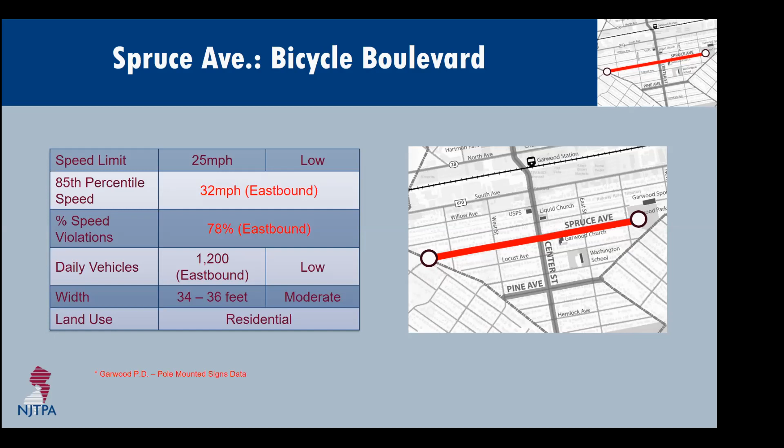Similar to 2nd Avenue, we recommend bicycle boulevard treatments on Spruce Avenue to complement and add on to the sharrows, to reduce vehicular speeds and prioritize bicycle and pedestrians. As previously mentioned, this will include lower speed limits, enhanced signage and pavement markings, chicanes and neck downs, mini roundabouts, and potentially speed humps and raised crosswalks if speeding remains a concern.

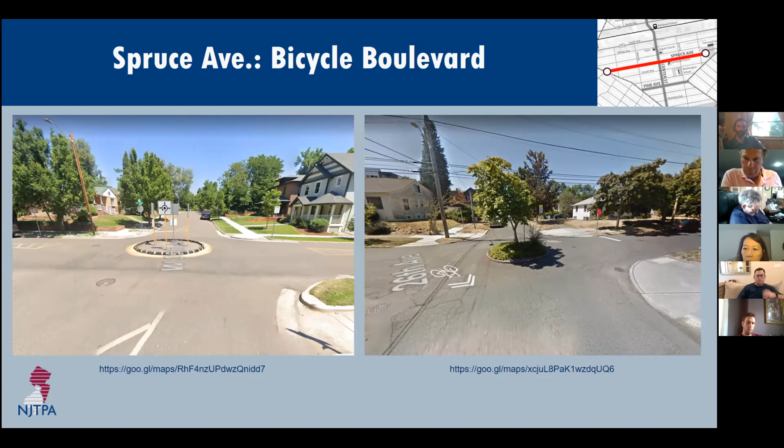Let's look into a simple illustration of a mini roundabout treatment. But before we do that, here is a quick reminder on what it looks like. Recall that it is possible to install these treatments in both low cost and high cost ways.

We propose a mini roundabout treatment on Spruce Avenue at Center Street. FHWA's lessons on traffic calming indicate that mini roundabouts are safer than 2-way and 4-way stop signs and signalized intersections. They also reduce the number of conflict points at intersections and reduce vehicular speeds.

This design incorporates curb extensions at all 4 corners and tighter turn radii to reduce vehicular speeds even more and increase bicyclist and pedestrian safety and visibility.

We also propose these intersection treatments, curb extensions, and tighter turn radii at other intersections on Spruce Avenue, since speeding is a concern here. As mentioned, they'll reduce these speeds, decrease crossing distance, and also limit inappropriate parking near crosswalks that deteriorates or prevents visibility. They can be properly designed to accommodate buses wherever appropriate, and they can be paired with raised crosswalks if speeding remains a concern.

As shown in these 2 pictures, there could be a variety of ways to implement them, both high cost as well as low cost. So before we move on to the next street, any questions for Spruce Avenue and the recommendations for it?

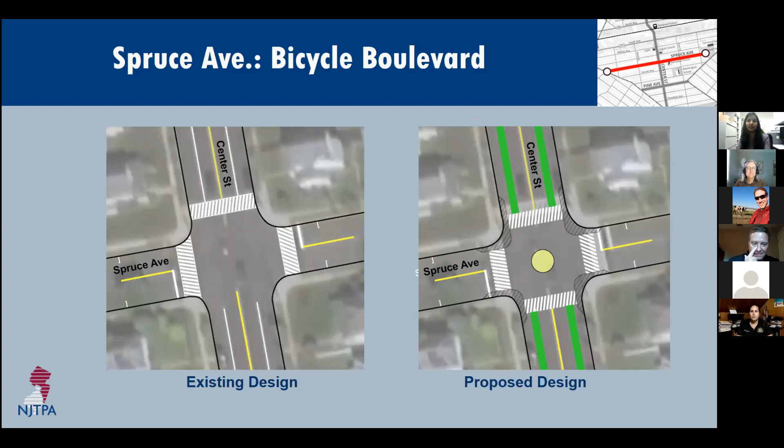It looks like the chief is typing into the chat. Okay, great, let's move forward. Sorry, couldn't get my mic on for a second. I have no experience with these. They're intriguing to me, so I'd like to do a little more research. Officer Kleinsorgen, I'm sure he's still listening, and I'm sure he's going to be looking into this for me. Perfect, amazing, thank you.

Okay, next we have 4th Avenue, which is the last section, last street we talk about here. It is cut into two parts at Walnut Street. Similar to the last section of Spruce Avenue, 4th Avenue is 34 feet wide, so it does not have the space for dedicated bicycle treatments. It also narrows down, and we've recorded speeds up to 100 miles an hour westbound on our street.

Yes. Yep, okay, the 100 miles an hour was a leaf blower. We did our research on that one. It was an anomaly. Good news. Almost had a fucking stroke. A leaf blower? That's bullshit, but whatever.

Leaf blowers can set off the radar on a radar trailer, yes. Oh, okay, thank you for letting us know. We just typed it right now. Highly doubt it, I live here. It was me. I drive a thousand miles an hour on my street every day through the point.

We can definitely, okay, that's actually good to know that the residents living here feel like it's not that high. So that's good feedback, maybe the problem is not aggravated as we would have thought. I don't think I said that.

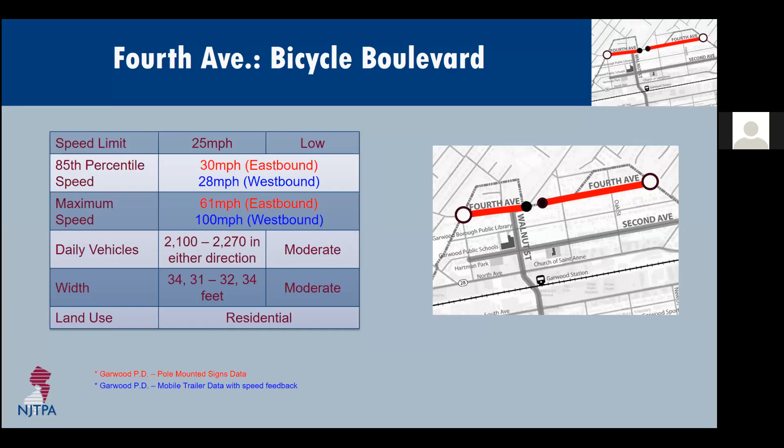Oh, and Kyle asks if there's any thoughts on having an all-way stop at that intersection. That seems like a good idea that we can add on to in our recommendations. Yeah, thank you.

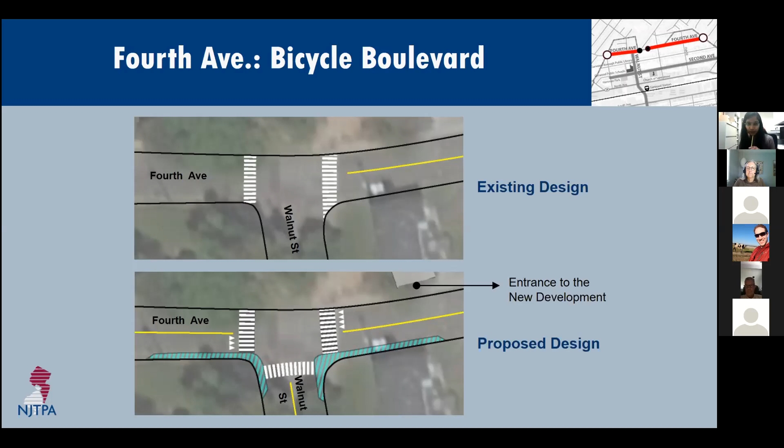This is Keith. I wanted to thank everyone for their thoughtful input today. There are a lot of challenges, as you've noted, in response to the very different components and streets we were able to look at. It was a different kind of experience, not being able to witness firsthand a lot of the different dynamics on the roadway. It's really important that you were here today to clear some of that up and give us more input and data to look at - anecdotes, and a number of great ideas came up. There are a lot of different complete streets treatments, and there's no one-size-fits-all solution. From what I saw today, there are a lot of challenges in this very small town, where even within one block, like on 2nd Ave, the cross section changes three times. So we're looking at, from a data standpoint - and thankfully there was a lot of good data we were able to look at, with the police providing speed data, and hearing additional anecdotes from residents - a lot of things we can look at and come back with a stronger plan, thanks to your input. I appreciate it.